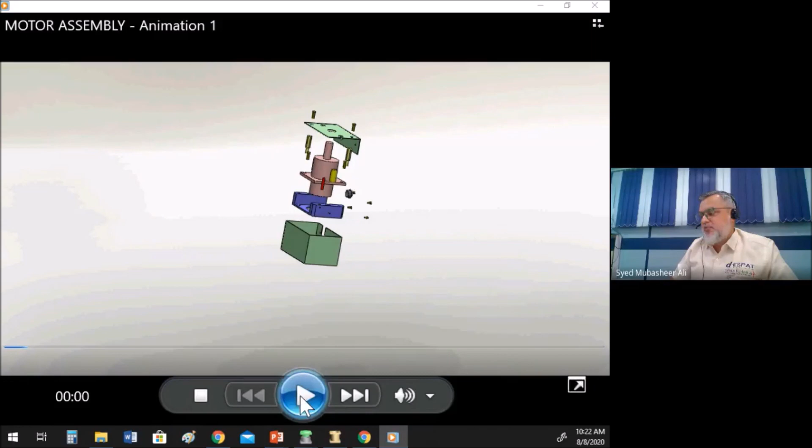This is the overview of the bill of materials. I'm going to run you through this video, pausing in between to explain the parts that get assembled. This blue base component is an aluminum base part, and it gets assembled first with a set of hollow cylindrical parts made of brass called bushings. This is then assembled with this pink component, which is a motor supplied by our vendor, held in position by 2 motor screws.

Next, I'd like your attention on this component called the standoff, which mounts itself on the base. This red part is a sensor held in position by a sensor screw. What comes next is an interesting part of our review today: the sheet metal part in green called the end plate, which gets placed on the standoff.

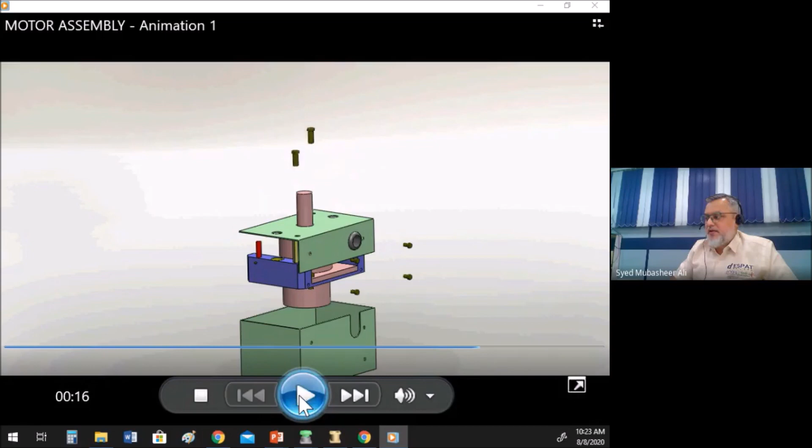This is a plastic or rubber grommet, an insulation component. Since we have a motor and a sensor, a bunch of wires need to be insulated from the metal part, so that is inserted there. The end plate is held in position by 2 end plate screws. And the last member is this green component sliding up from the bottom, called the cover, held in position by cover screws.

I hope that video was useful to understand the overall assembly. I'll keep this minimized and we'll come back to it a little later. So that's what this bill of materials looks like when it has to be assembled.

Now I'd like to bring focus on some parts we're going to review in today's session. I've listed these parts on the left-hand side, and I want to quickly tell you what we know about them. This is a component called the end plate and this component called the cover. Together, they form the enclosure of the product. If you ask why you want this enclosure, it's simple: this is a motor working in a harsh environment, and you need protection from that environment, so these components provide that protection feature.

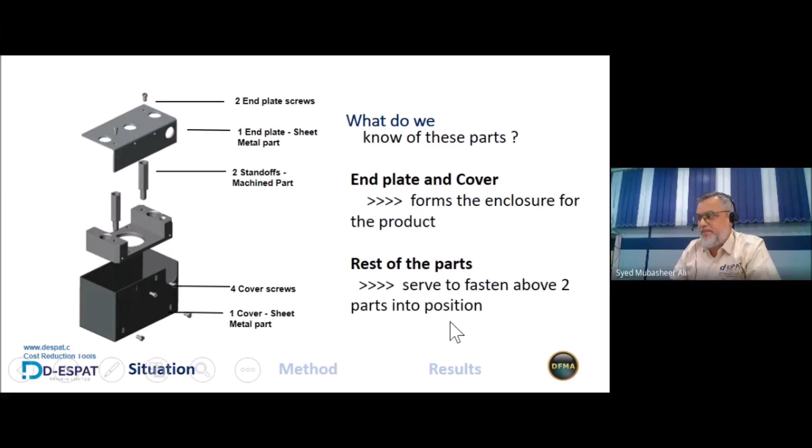I'd like you to note that this enclosure provides the protection or safety aspect of the product. How are these parts held together? That explains the remaining 8-9 parts that are there—the rest serve to fasten these two major components into position. Now, let me bring up a snapshot of the video I showed you a few minutes ago.

This is what the two parts would look like when assembled. Please keep this image in mind as we go ahead to analyze what we're going to do in terms of time and cost simplification.

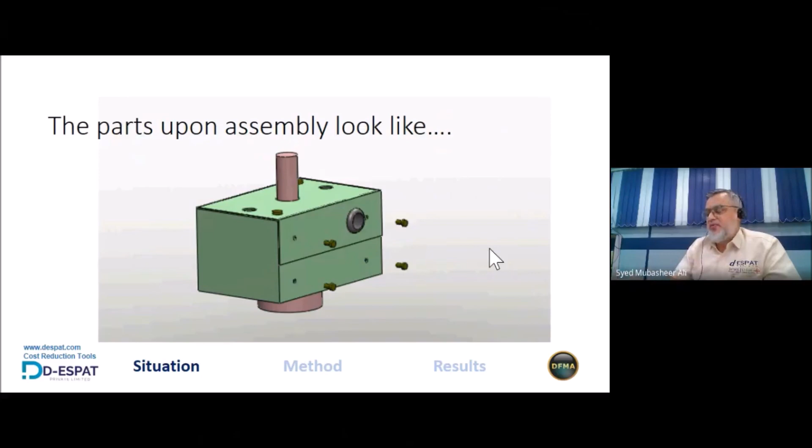Let's say we are given a task to review this design, and our management has said, can you find some ways to minimize the overall cost of this product? There are several things one undertakes as part of this review process.

That's the first part of my overview session today, talking about design review and particularly giving you a perspective of the design for assembly overview aligned to this thought process. Several different things one would do in order to get ahead.

But I'd like to ask these questions to the audience. When you come out with new ideas, how do you quantify that? How do you quantify the function of the parts? Let's say we are capable of doing this and we follow certain methods. The question next is, how quickly can you do it? Then how reliably can you do it? When I say reliably, what I'm bringing to notice is, when you come out with an idea, how do you convince your team members, your project members, your management, or your customer that this aspect is good, it is correct, it is better? These are many aspects that are of concern.

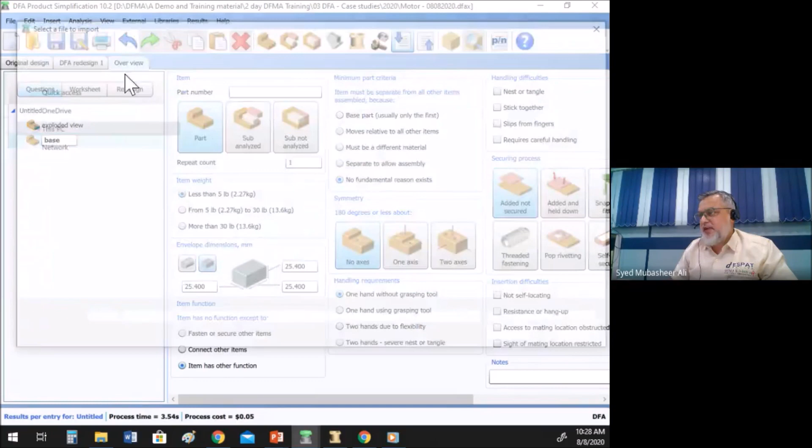Let's talk about the angle where we are keying in information. When you talk about a part, the DFA method is a question and answers based review method. So what you see on the right-hand side is called the question and answers panel. As you keep entering answers or giving details in this panel, what you get at the bottom is a cost review and a time review of assembling your part.

So when I start out an analysis with the DFA, a couple of things you need to know is how many parts you'd like to make. Maybe it's one prototype, maybe tens of thousands, or maybe hundreds of thousands. It depends on what kind of environment you're working in. Of course, if you're a university grad, you'll probably talk about doing one prototype.

You may want to have an estimate of how much it costs you to spend time on your operator, and this is basically oriented towards industry, so these things are also relevant. And how much is your efficiency in terms of the work you do? You may say, how much of my time am I spending on a project? If I'm spending, say, 50% of my time on my project, that number should probably go there.

So coming to each component in your product, what the software wants to know is very user-friendly, easy to answer questions, from the perspective of the user. So you'll say what type of a component this is, whether it is a part or a sub-assembly. What is the weight profile of your component? What's the overall geometry of your part?

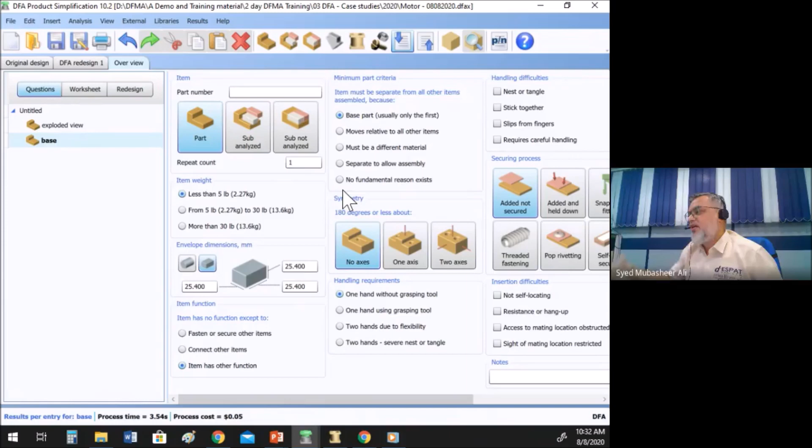Or if it is a component that has to be separate to allow assembly. For example, the cylinder head of a motorcycle or car engine. The cylinder head and the cylinder are made of the same material, but in order to allow assembly of the components inside the cylinder, the cylinder head must be a separate component. That would be the separate to allow assembly option. If it doesn't satisfy any of these, please be critical and select the next option saying, I don't see any fundamental reason for this component to exist. If you do this in a very unbiased manner, you will start finding opportunities to save.

There are 2 more things you'll probably need to add about the product as you assemble. This is your foresight about how the component is assembled. If it is a symmetric component, what kind of symmetry it has. I'd like you to notice when I click on 2 axes what happens to the process time. It will change depending upon the symmetry of the part. So more symmetric means less time, less confusion, and fewer mistakes to assemble the part. I'm sure you agree, right?

And the next thing we want to investigate about the part. I want you to understand that all of these attributes are about the shop floor: you've designed your part, it has been manufactured and is available for the operator to assemble. When he's assembling, what issues does he face? How does he interact with the part to bring it and assemble it into the full product? Those are the questions we are answering here. It involves a physical activity.

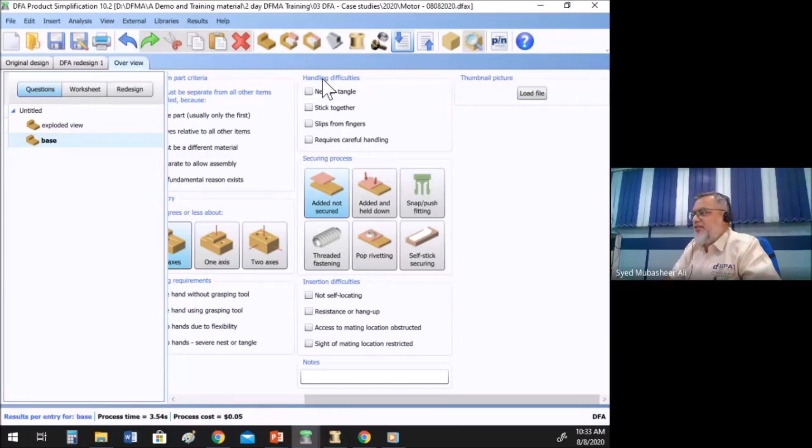How does the operator handle the part? Does he or she have any difficulties? If yes, then you'll click it. You must know that each click means you're adding penalty time for assembly. Each selection of a different securing process means you get a penalty time aligned to the process.

For example, let me go back to this original design, where in this review I've added all of the questions related to the parts. I have also keyed in all of the parts in the bill of materials. This little window on the left-hand side is not called the bill of materials; we have a unique name for it, the product structure chart. The product structure chart includes the bill of materials, but also the standard and non-standard operations required for a component to be assembled to form the full product.

This right-hand side is the question and answers panel. And for each entry that you make on the question, you get a review on the bottom left-hand corner. Now, in the interest of time, I have a product. This is my assembly, and I have keyed in all the components in this design of the parts that are here.

Now, my area of interest, which is the focus of today, is to help you do design review. And I'm basically looking at these parts, that is the cover and the end plate, and the components that are going to assemble them together. So in our tool, when you do any design entry like this, once you have done this question and answers entry format of information collection, you can do a beautiful postmortem through industrial engineering worksheet generation.

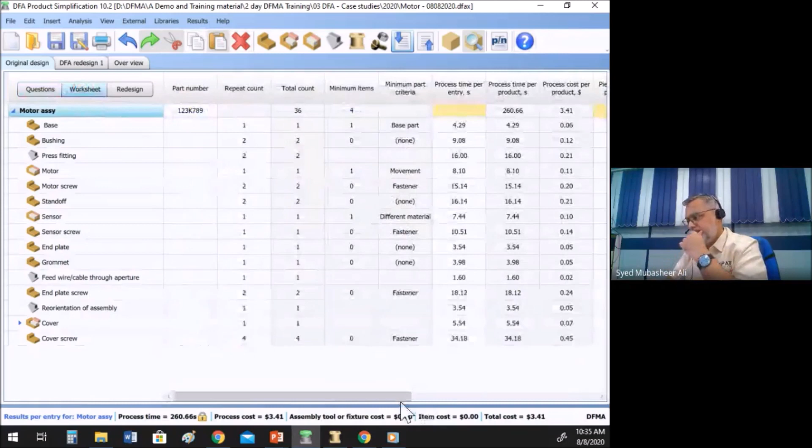Okay. And I'm not going to get into this in the interest of time, but more importantly, a very fast and relevant feature called suggestions for redesign. Ladies and gentlemen, this is a very interesting review capability of the design for assembly module. What it does is it gives you a rapid breakdown of opportunities based on the entries that you have given as a user of where there are possibilities to save.

So let me jump into this category 2, which you can see. Can you see this category 2 on the right hand side, gentlemen? I'll wait for a yes from Takshak so that I can go ahead.

Yeah, thanks. So I'm going to click on this element called fasteners and see what happens. Okay. If you look at this review under fasteners, this product called motor assembly has 4 different types of fasteners. That's what this means. Let me bring your attention again closely to this element called the cover screw, which seems to be the largest time contributor for assembly.

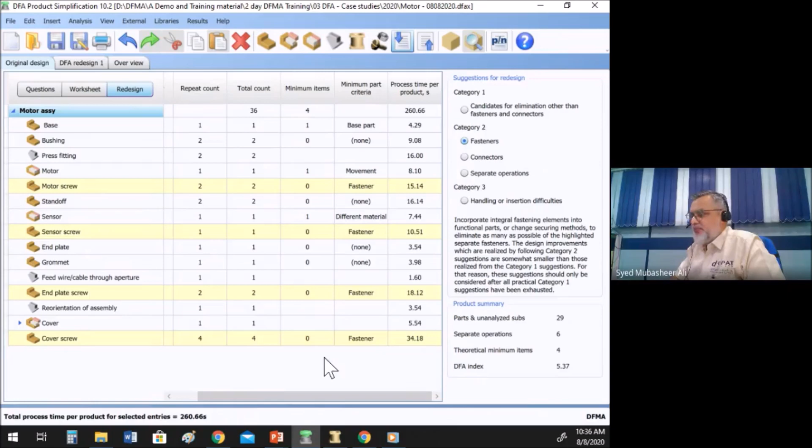Excuse me. So if you dwell on this and look at the product process time for most of the components, coincidentally, this element called the cover screw has the largest time contribution in putting this part together. So if I quickly nudge back to my presentation and show you the slide, this is a cover screw.

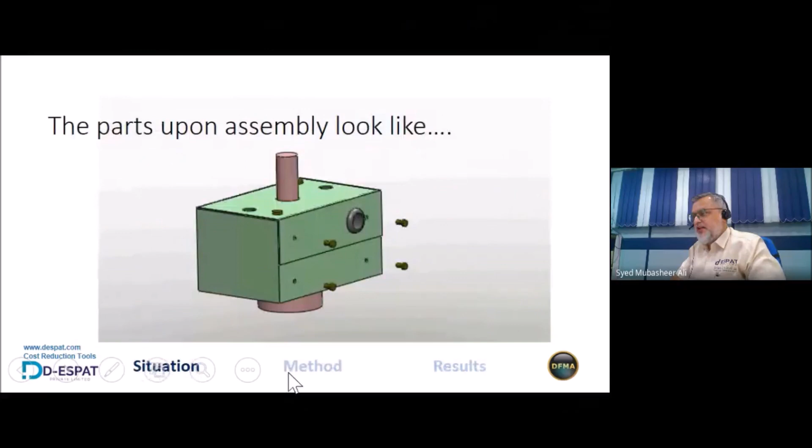Now let us just talk about this for a minute. What is this cover screw doing? It is holding the cover in place. What is the cover doing? It is doing the action of protection. Is the cover alone the component that is doing protection? Let's do this review going forward. So I've done a quick extract from my DFA review and put it up in the slide for one view dashboard for all of us to quickly understand.

Does the end plate screw fasten itself to the end plate? No, it goes through the standoff. And if you remember the video, the standoff is fastened to the base plate. And we have this cover, which is held in position by these 4 cover screws. So, ladies and gentlemen, what I've done is a neat extraction of data from what I saw as the time contributor for the cover screws.

It takes 34 seconds. And when I did a reverse thinking of why the cover screw is there, because it's holding the cover in place. Why is the cover there? It is doing protection. Is the cover alone doing the protection? No, I also have an additional component called end plate. Through this system of brainstorming and negotiating and deliberating with my team, I found out that I have in this product 10 components that serve this feature of doing a protection function.

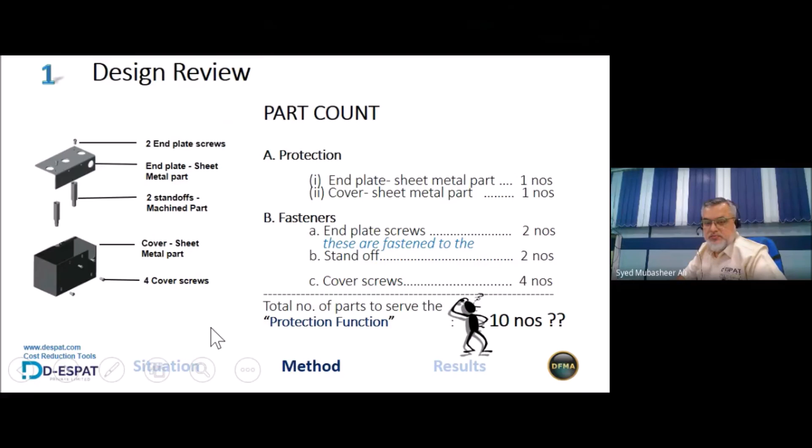So what do we do once you find an opportunity to review, right? You need to form your team, you brainstorm with them.

And brainstorming alone is not sufficient. You want to do creation of your ideas or representation of ideas through sketches and 3D models, whatever is available with you. And of course, there are a lot of deliberations that go back and forth. You need a convincing approach. Well, that is the word.

You need to convince somebody to say, buy in this design and let's go make this new proposal that we are going to make. And most likely, all of these opportunities are either value addition or value engineering, or most likely an opportunity to have a new design. Now, a new design, and if there are manufacturing friends here, they will agree that's an expensive ordeal to take on, right? Because there are some challenges that every engineer will probably have to go through in order to push his design idea.

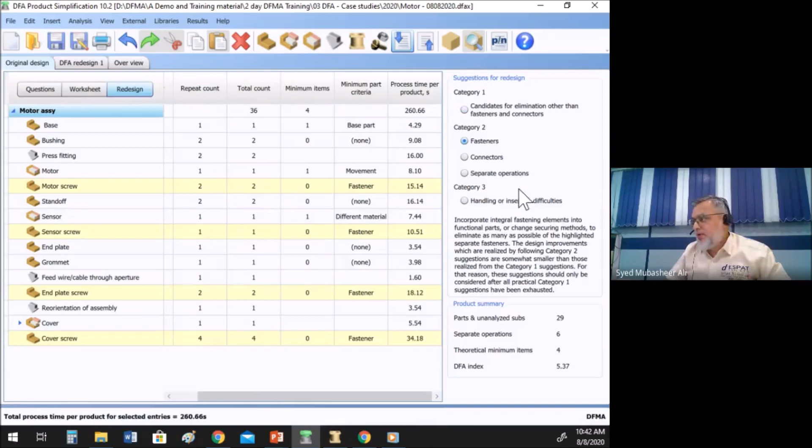Where I left off was, I was looking at this design review part wherein I looked at fasteners, and I looked at the cover screw, the largest time contributor. I challenged what this cover screw is doing. I found out what it is doing. Then I came out with a new idea. Got it? Now, if I have such an idea, what I can do with the DFA tool, ladies and gentlemen, is I can prepare a quick intent of this existing idea, make a copy of that, and probably make a new proposal of my proposed new idea.

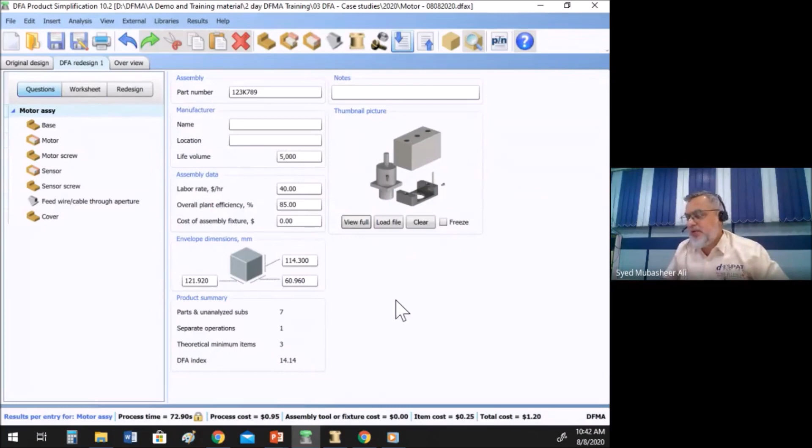Again, let me tell you, I'm not having CAD data at this point. This drawing that you see here is just a drawing or probably a sketch or just overview dimensions. Even with this stage of information available to me, I can do a very relevant comparison of my design intent. So what comes out when I have a new proposal is I can create several different rapid feedbacks of my design intent. Let me just quickly help you read this report.

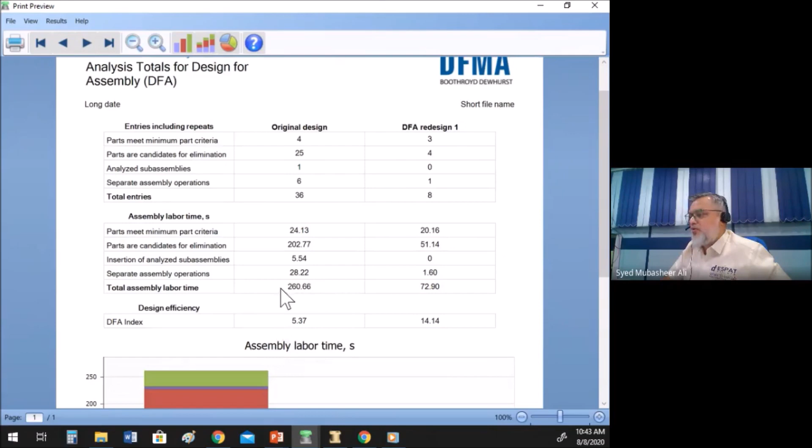So what was an original design of 36 parts could probably become a potential 8-part candidate. What took about 260 seconds of assembly time could now become 72 seconds. And also what I'm able to do with this DFA method approach is I can create a design efficiency measurement of what my existing design was and what my proposed new design is going to be. And this will be an area of excitement for us to see whether we can proceed with the design and so on.

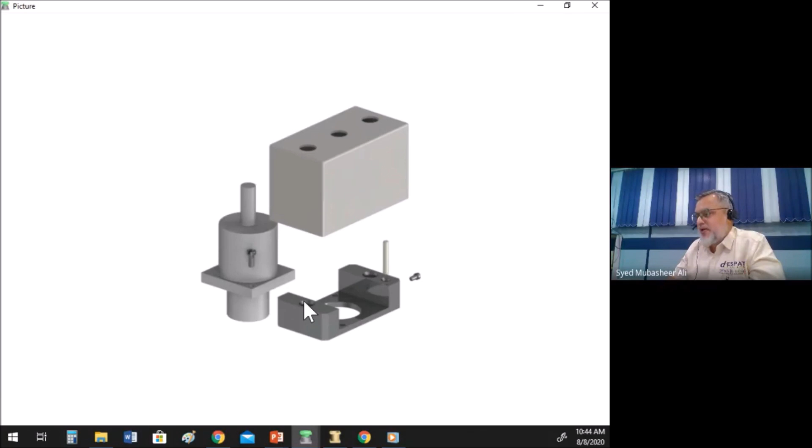Now you may say, sir, you have done this demo and kept it prepared. How do I know that I can really do something like this in the real world? So let me do a couple of real-time scenarios in the next 2-3 minutes, okay? Before I jump to the other aspect, which is called part costing using DFM. So let me blow this up for you. Look at this motor for a minute. If you remember, I told you that this motor is a vendor-supplied part. Okay, let me open the more colorful exploded view in this 3D view.

Can you see this, Anish Ji?

You'll have to keep giving me feedback so that I know that I'm on the right track and it's visible. Super. Thank you so much for that.

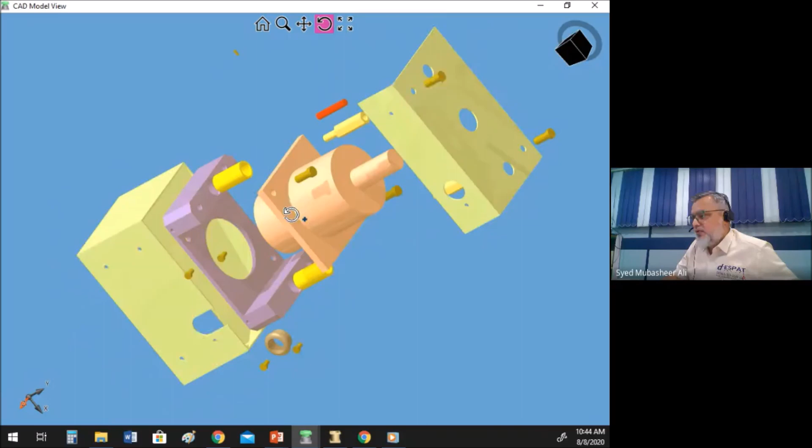Now this motor, if you see, has a very regular size base, which is almost like a square. Actually, it is a square. Now, I'm just putting a hypothetical situation for you guys. When my operator assembles a motor, he can put this motor, which has these 2 diagonal holes, either this way, or he can rotate it 180 degrees and insert it the other way. Very possible, isn't it? What happens because of that in the real world is, if the guy puts it in the wrong direction, the motor wires become a little shorter to come out of the total motor assembly.

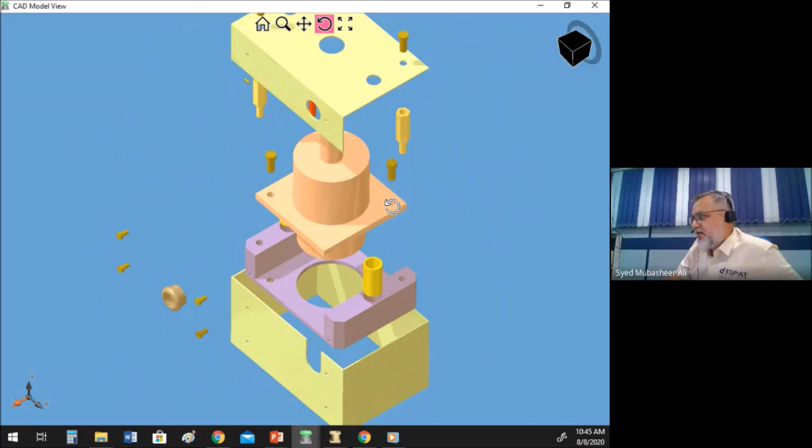So let us say I'm going to tell my motor assembler, you know what? I learned from this guy called Syed about part count reduction. So here's what I want you to do for me. Since you're going to supply motors for our company XYZ, I want you to cut off this corner like a chamfer, like your SIM card. I will ask my aluminum supplier to have a chamfer here. So I will make these 2 parts no error, and I'll use only 1 screw to fasten.

Let us say for a moment this is a good idea to do mistake proofing. You know what I can do? I can find out what is the benefit of that, or does it really make sense from a DFA perspective? Can I go and show you that?

If you are interested, say yes on the chat box. Awesome. Thank you so much for that.

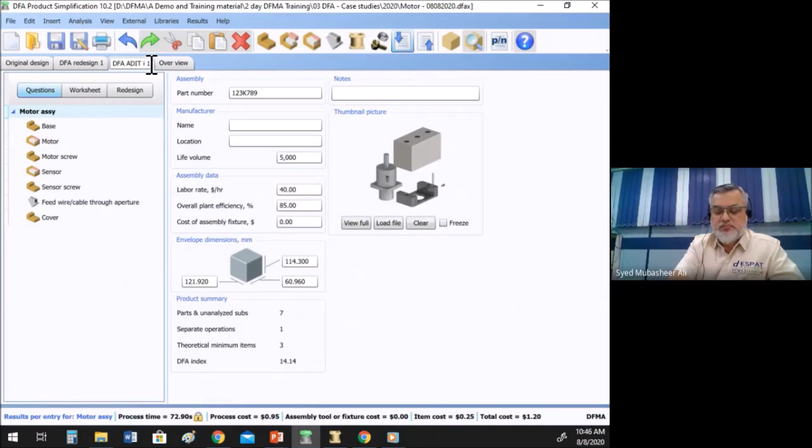So what I'm going to do is I'm going to make a copy of this, paste this, rename it, and call it ADIT idea 1. In this idea 1, I had a motor which is supposed to be placed in position, and this motor screw, which had 2 numbers, which was fastened using a threaded operation. Of course, motor screws are threaded, right?

And the beautiful thing about DFA is, depending on the process you select, it will bring up the operation characteristics that are required. If I selected held down, it brings up different types of questions. If I select snap fit, it brings up a different snap fit question. If I say pop riveting, it will bring up the operation characteristics of pop riveting. If I said threaded operation, it brings up the operation characteristics for a threaded component. Again, the database is so vast, ladies and gentlemen. If you type different methods for fastening, you will get different feedback about how much it costs in terms of time to assemble it.

Now, have you ever thought about it as a user when you build a functional component? Because most of the time as designers, we are used to achieving a function of the product, for which we are designing these parts, right? Yes, sir. So most of the time we are not challenging the parts as to how much time they are contributing.

But the beautiful thing when you do a DFA approach: let us say if I have 4 revolutions to fasten with the nut screwdriver, the process time is 18. If I change that from 4 to 14, I can get upfront what is going to be the time for fastening. So I can look at attributes like this and build much better, simpler, less time consuming product builds.

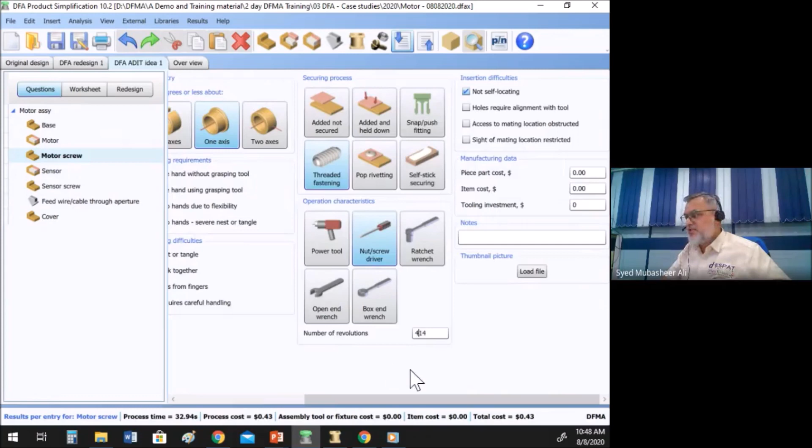So anyway, in this case, what I want to come back to is my motor is going to have 4 revolutions to fasten. Sorry, I got a little distracted with somebody coming in. And I will say instead of 2 screws, I'll have 1 screw to fasten. I can get rapid feedback of this in design intent under result proposal right now. And I'll say, this was what we created just now.

Interesting? Yes, sir.

What I'm going to do is, I have another idea around this motor screw. Just like your pen caps, which snap fit into position, I got a creative new idea for this part. What I have as an idea, I'll just quickly show you on the exploded view. And I figured out I can save a lot of time if I remove this fastener.

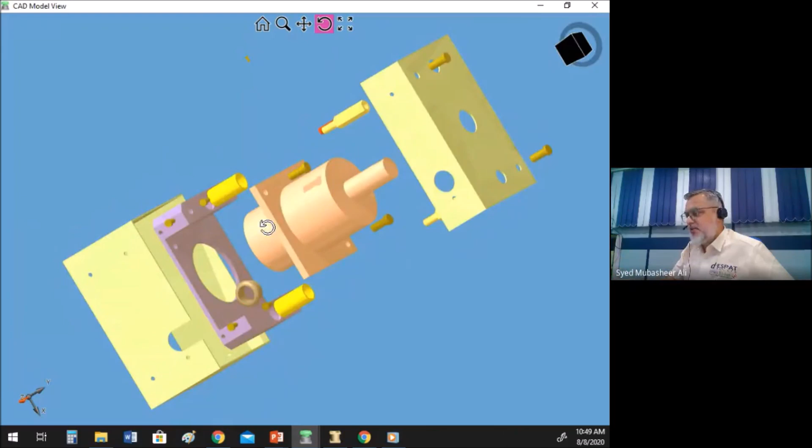So crazy as that might sound to you, I'm going to tell my motor supplier, you know what, give me a snap fit ring around this motor base. I'm going to snap it into position on this base part, the aluminum. Right now it is aluminum. Maybe I will consider making it of some other material in the future, because I want to find a cost opportunity to save there also. But the question is, what if this is a snap fit design?

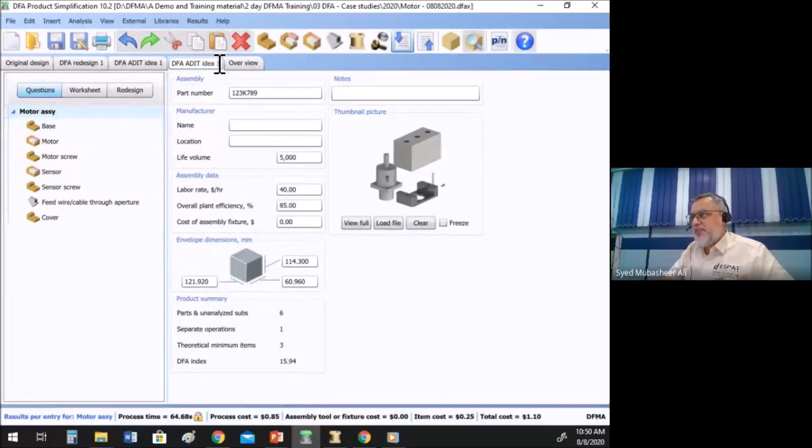Okay. While the process usually we would engage is, let's go do the engineering, let's see whether there's interference check and so on and so forth, what we advocate is you go and prepare your proposed idea in this risk-free environment. Okay, I'm going to call this idea Snap 2, in which I'm saying I don't want to have the motor screw anymore. I'll delete it. Instead, I will take the motor itself as a snap in position component. It's asking me how many snaps do you want. I'll leave it at 1.

And ladies and gentlemen, in the last 3-4 minutes, I have created 2 ideas for you in the overall picture of things for doing a design review, and a tool that is capable of giving you a product profile breakup in several different attributes. Okay. Now I'm showing you a different profile report in the interest of time. I'm showing you what is the cost breakup.

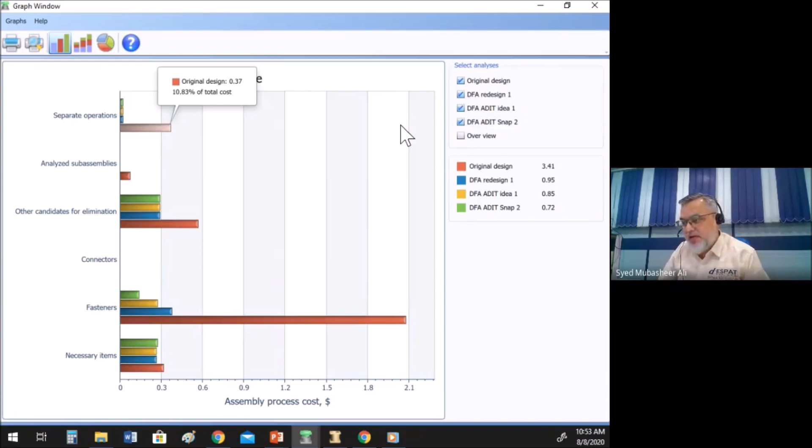I hope this helps you to understand what kind of a role this tool can play in the reviewing of your ideas. And of course, the tool has several different types of report generation. We'll talk about it at another opportunity. But let's move on to the next session of my presentation. Can I move on to the next session of my presentation? Yes, sir. Please.

Now we have this part. I'm telling the story around the same product, which we have now sort of improved. And if you're seeing my screen, these are some challenges that any industry or designer would have.

This looks like a good idea. DFA says it's got good potential to save in terms of assembly time. But what's a good process to make this part? If I change the process, what happens to the cost? Will I get savings, or will it become more? If I'm part of a company, can I give this information very credibly to my purchasing or procurement team so they can influence the vendors in how they procure these parts?

What happens if I can work with, say, Vietnam or Malaysia to manufacture this? Consciously, I'm not using China because we're in a scenario where we want to get away from it. But these are things companies keep considering, right?

So the potential we saw from a part costing perspective, I'd like to talk about before I go there: if you have an opportunity to save and simplify your product, that complex product could probably become something simpler like this.

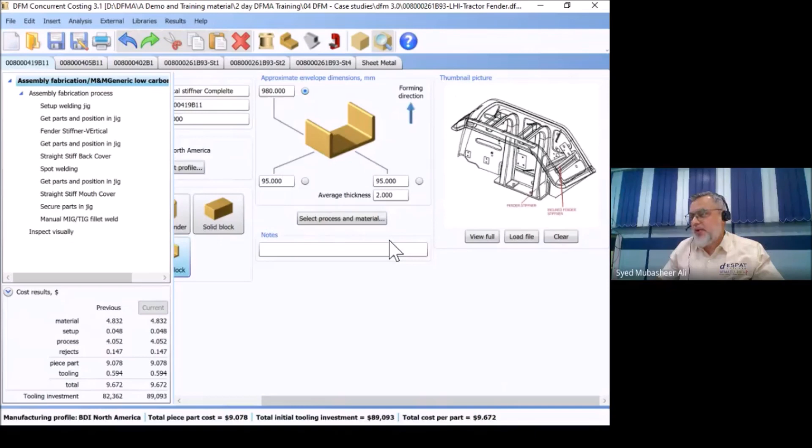This is a 3-part window again. One on the left-hand side is called your process chart. On the right-hand side is data related to the process, and at the bottom is the cost per part that you would get. What I'm going to do is minimize this, and I'm going to show you the feature called concurrent costing by opening up the DFA.

So I've come to this DFA part where I have this idea of this cover. I'm going to take this idea of the cover and concurrently open this component through my DFA analysis concurrent connector and say create a new DFM analysis. I'll say ADIT sample. And what happens is this cover information...

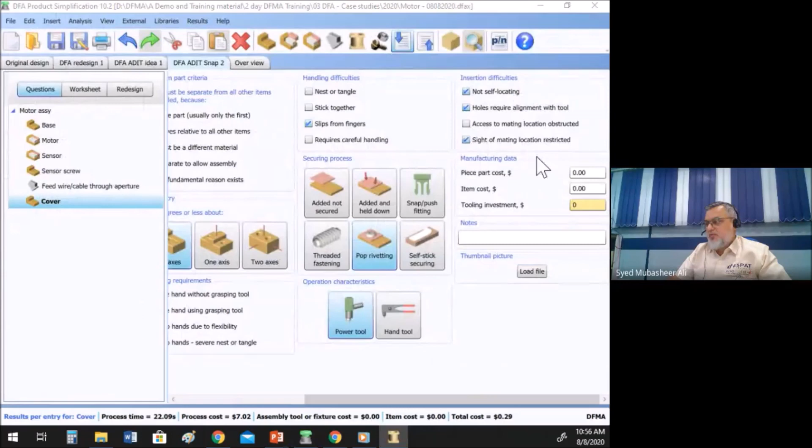Just give it a second. This cover information, which has this overall geometry - just have a quick look at this, 114, 71, 58 are the dimensions of the part. This motor assembly, we want to make 5,000 pieces. All of this information can simultaneously come into your DFM window.

Now, before I go ahead, I want to tell you this: imagine if you have a design team working somewhere in one part of the globe, and a manufacturing expert or manufacturing vendor sitting somewhere else, and these two companies are connected to the same server, they can simultaneously exchange information like this. That's why our tool is called concurrent costing tool.

So without much ado, what I'm showing you here is that the data from that cover in the DFA has come into my DFM module. It's just asking me for one piece of information, saying please can you give the thickness. So I'll say okay, I want a thickness of about 2.5 mm for this part. I have selected an overall geometry, and the life volume is automatically come in.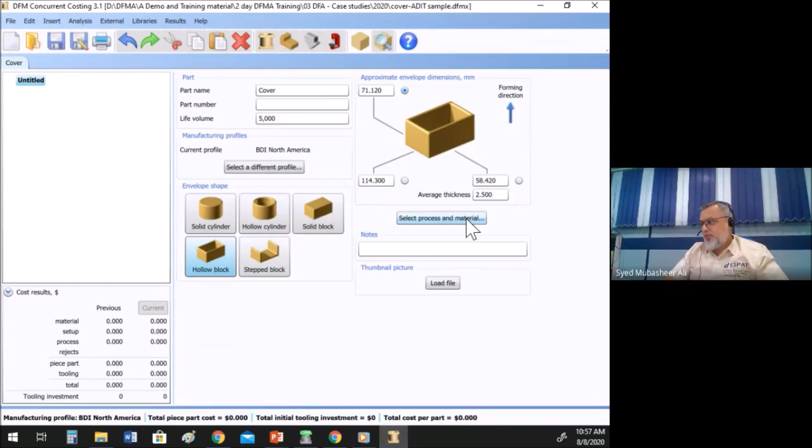And ladies and gentlemen, I'm going to show you something very interesting and very proprietary to our tool. You select this process and material icon, and what comes up - are you able to see this process material selection chart? This is very unique to DFM, which means given a geometry and a life volume, you select a process, and tada - it shows what are the compatible process materials it is suitable for.

Alternatively, if you have a material in mind, let us say we go down to plastics. Let me make this a little bigger.

If I select plastic, it'll show me what are compatible processes. Isn't that interesting? You don't have to rely on a manufacturing expert. I have a design, I don't have to go get myself embarrassed in front of somebody who's going to ask me a lot of information about how to manufacture this part. I have a tool in a safe environment, even before I go do the CAD model, before I go talk to my team members, I have the ability to review it.

For example, ABS with cold chamber won't work. Red color means the process and material combinations are not possible, maybe extrusion plastic ABS. If you see green, that means possible. Sometimes I may want to intentionally take something like this.

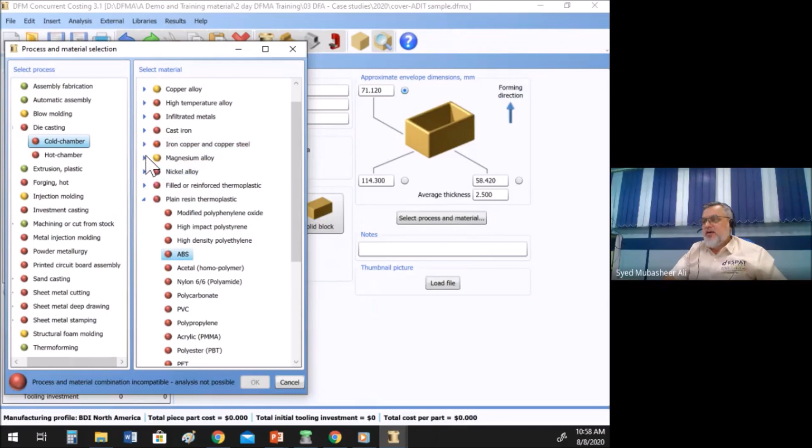I can say, you see yellows, which means you may be able to manufacture this part, but there's a potential that some things may be exceeding in terms of possibilities. For example, it shows you a warning: hey, if you select cold chamber and aluminum alloy, your volume is 5,000 pieces. It doesn't make business sense to manufacture unless your life volume is 10,000. Gentlemen, even if you're not a manufacturing expert, you have a tool that helps guide you in getting feedback like this.

Okay, let me do a little dramatic play here. I'm playing the role of this person called Mr. Syed. He and his team have done good work doing a DFA review of an existing product, and they've brought it into DFM, but they have no clue that they made an error in giving the average thickness. If you can see my average thickness, you should probably read it out for me. Sir, it is 12 mm.

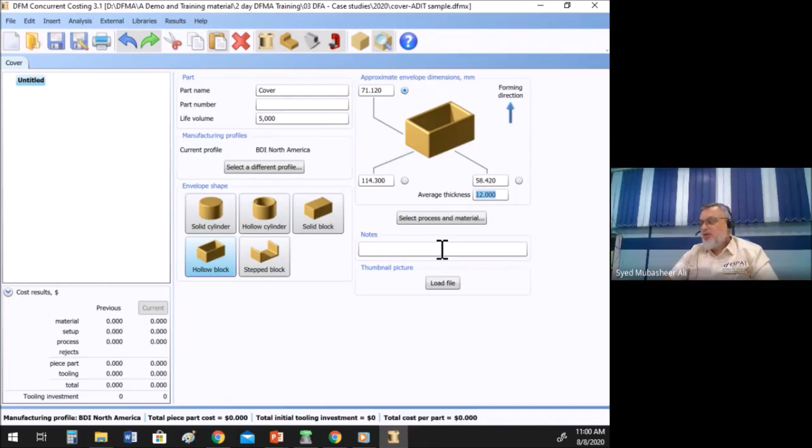So let us say this oversight of 12 mm was keyed in as average thickness. I select process and material. I'll go back and select the same process and material for your information. I selected cold chamber and aluminum alloy. You see what comes up at the bottom, ladies and gentlemen? It's saying, last time we showed you an error of 10,000 being unlikely to be economical. Hey, we got another problem. If you have a section thickness greater than 11.9 mm, you can't manufacture this part.

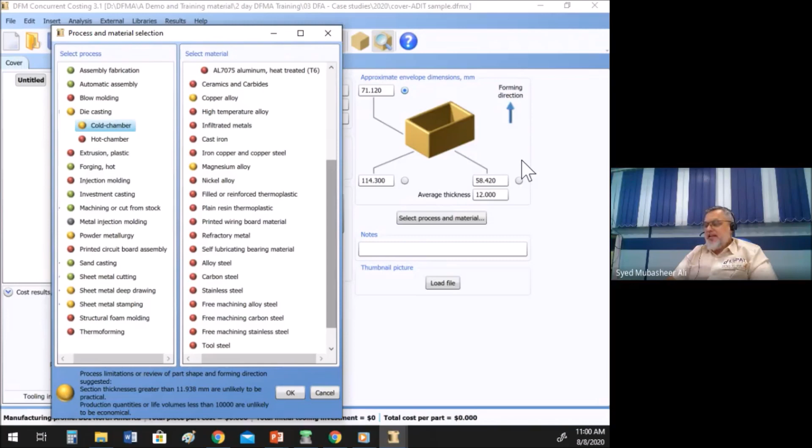Imagine if you see this error after you finish your prototyping and you came to production. Your production guy says, hello boss, you didn't talk to me, who told you we can make 12 mm? Our machine cannot cast this. You know how much money and time is spent? Companies spend millions of dollars going through gut-feel design or experience-based feedback, and they come at a later stage in the product design process where all efforts are actually lost, or the reverse engineering or re-engineering costs a lot of time and of course a lot of money, right?

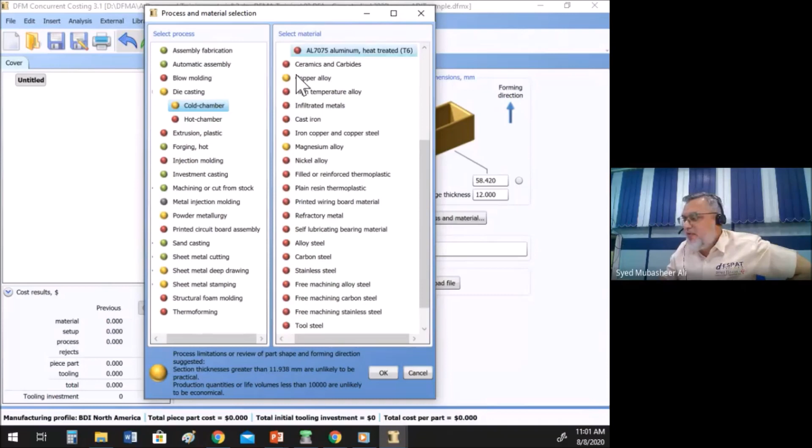So this is what the tool is able to throw out to you. This is one piece of information. The second bit of information I'd like to tell you is, DFM is not pure science. Let me repeat, it's not pure science. It is a set of guidelines documented as best practices with industry inputs, academic research done over the last 30-40 years. So while 11.9 mm and 12 mm are not so far away, maybe my manager in production will say, Syedji, don't worry, 12 mm, we will manage and get this done if this is important for you. So with that role, I'm going to go back and say, let's continue and evaluate for 12 mm.

Do you agree with what I'm saying? Am I too fast? Yes sir, wonderful. So with this 11.9 mm unlikely situation, I still go ahead, just for the sake of this presentation, and say, okay.

Gentlemen, what happened is in about 1 minute, we have quickly created a process chart for aluminum. We have data specific to our aluminum process. Since I selected the die casting process, it automatically brings up the subsequent operations required for die casting, and quickly gives me a review of my cost. There are other elements also on the right hand side, which is exhibited here.

Anishji, I'm so sorry, I would request you to keep yourself on mute. Thank you so much.

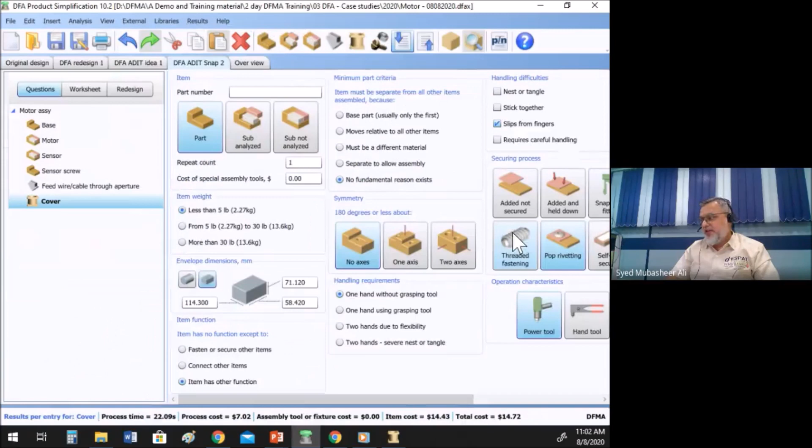So while I do this first level input, I want to quickly jump and show you in the DFA, simultaneously, this cost. Let me minimize this and show you. So if I'm a design guy sitting somewhere else, whatever cost I'm generating in DFM can come simultaneously into DFA.

That's why many of our customers, who are either OEMs working with multiple partners geographically, or MNC companies or engineering service companies, are working in the daytime in America, and by night they have data which is synced on for them on all their design intents. This is the strength of the collaborative effort of manufacturing using both these tools.

So let me minimize this, and I have some questions now, so that I can take a little short break while I have something to sip.

This is to understand from the audience, and probably Anishji, you can shoot out some of the answers that you see there. My question to the audience is this: let's say I have a vendor who says, you've told me that doing it automatic will cost this, but I only have a manual setup. If I select manual, what do you think will happen to this cost? Will it go high or low? Please collate and tell me your feedback. I know you don't know this product inside out, but just make a guess. If I select this casting process to be manual, what do you think will happen?

High or low? Anish, have a look at it. High, sir, some say. Very high, sir, others say. Are many people saying high or are many saying low? Many people are saying high.

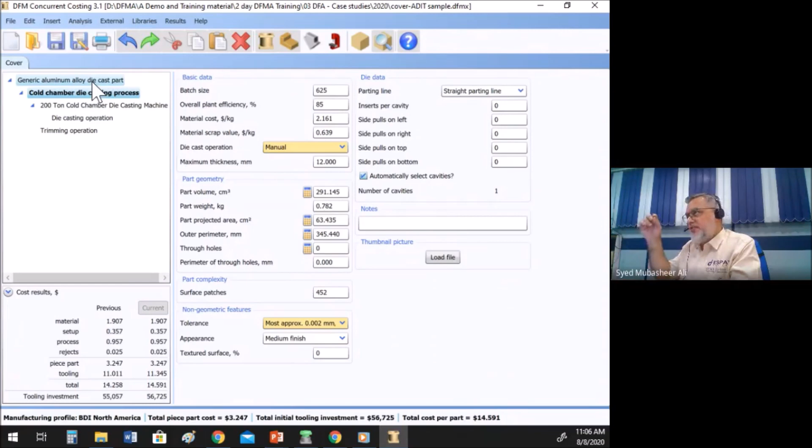Okay, now in the essence of time, I think we started 15 minutes late. I'm hoping I can continue for another 15 minutes. Is that okay, Dr. Ajit? No issue, sir, you may continue please. Okay, so.

What our software actually intuitively does is it goes and selects the most economical machine on which jobs should be done. It goes and selects and recommends the most effective combination of elements that can help you to get the lowest cost at the first go. Okay, how interesting is that?

But now I'm going to play a different role for those of us who are from the industry. Let us say we are talking to a vendor and he says, sir, you have done a casting with this ideal estimation. That I understand. But you know what? The smallest machine I have in my factory is a 900-ton machine. So many of our customers use this tool to have realistic vendor cost estimations. So I will say, okay, check, let us use the 900-ton machine's database values and run this analysis.

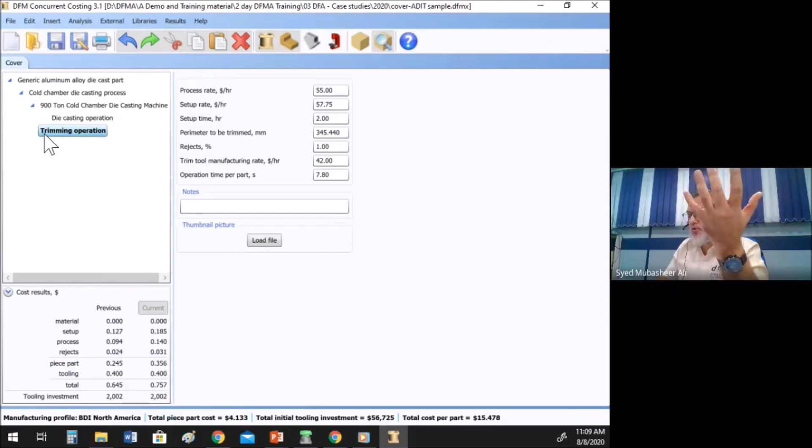I showed you what was a primary process called die casting, but a product like this cannot be just finished with die cast or the first primary process. You may want to have subsequent, secondary, and tertiary operations. So let me go and add a machine tool. So this is the list of machines that you can probably add as a part of our operation after a die casting operation. Many of the commonly used machines in the world are available as a part of our database.

Okay. Now you may say, sir, your machine only has what, 7 types of machines? 1, 2, 3, 4, 5, 6, 7, 8 types of machines. Well, ladies and gentlemen, that is not the case. Let me go quickly and show you that we have 3 different libraries. We have a library of operations, materials, and machines. Just in the interest of the context of this part of the session, let me open the machines library. Okay, this is my machine library.

All right, and it's very exhaustive. It has got a comprehensive database of machines from different commodities and different actual company models and makes and manufacturers. Then the question is, hey, why are only these machines coming up? That's what the software beautifully does. Depending on the process that you have selected, whatever is a possible set of equipment that you can use for subsequent secondary operations, only that it will bring up for you. Thereby, it prevents any user error. Okay, that's another interesting feature of the tool.

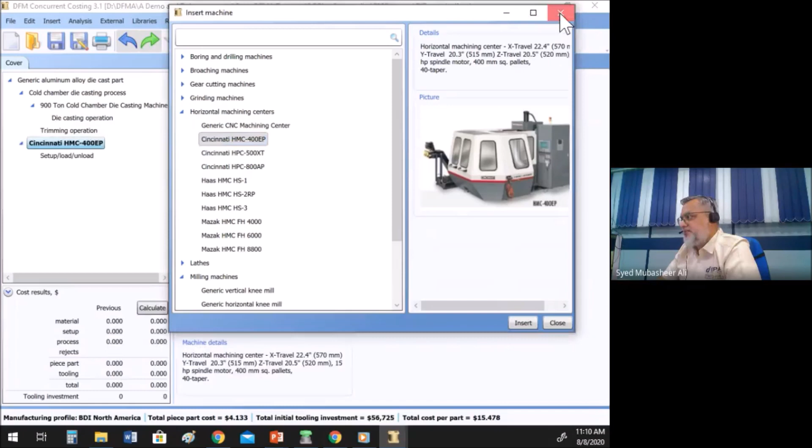So let me just go arbitrarily pick a horizontal machining center and insert it. Okay, so whatever is the operation characteristic of that machine in terms of cost to run it, in terms of power, the spindle speed. Please note that the spindle speed here is 8,000 RPM. And you can go and set up other things like what is going to be the cost to set up and unload and load parts in this machine to do the operations, what type of holding devices you can use. All of this has a bearing on how the cost can plan out. You see, you get a rapid feedback of your design intent.

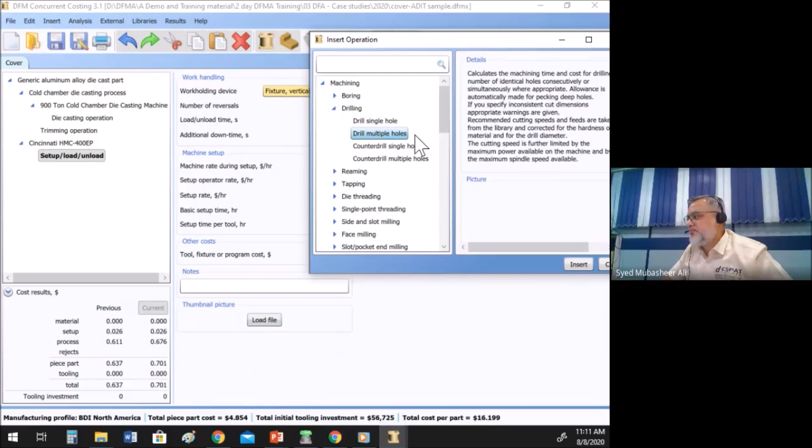Let me just do one operation here, gentlemen. Let me go and add an operation of drilling 3 holes. Why am I going to drill 3 holes? Because if you remember, this part has 3 holes in the top. So just for the sake of it, I'm going to drill 3 holes. Okay. Let us say that the dimension of the hole is 15.

Can somebody tell me what is the length of the hole? If you're watching my input, somebody can tell. Sir, it's 0. Right now it's 0. Right now it's 0. Yes, of course. What should be the value I should input there?

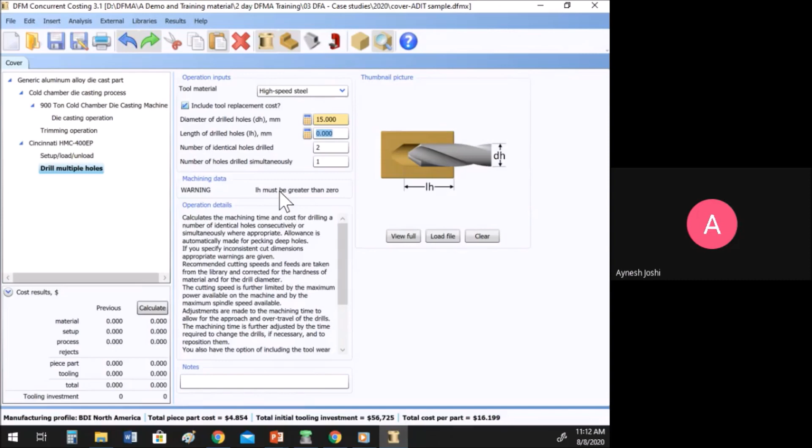Sir, 20. You may keep it 20. If it is related to the part which we are going to manufacture, it has to be the same as the thickness, at least. Yes. So what is my thickness? If the thickness is 12, we may go by 12 millimeters. Correct. So the thickness of this part was 12, and I'm going to give 12 as the length of the hole to be drilled. Thank you so much for that, Aynesh.

And we have 3 holes to be drilled simultaneously and 1 hole at a time. So when I key this information and press calculate, gentlemen, automatically the software brings up these attributes. That is the machine data, the machine limitations, how much cycle time to machine those holes, and what will be the volume of material removed. All of this is estimated as a part of the exercise.

Okay. Now, I'll just show you something interesting. Again, I'll play the role of a vendor. If I was a vendor and a procurement head was looking at this, he will say, you know what? This machining can be done with a machine that has got 1,300 RPM. Why are you selecting such expensive equipment which has 8,000 RPM to do this job? You see, these kinds of estimates can come out of this tool. Now, talking about drill, we gave 2 bits of data and we got 3 pieces of information which I can edit and about 4, 5 pieces of information that are generated from the tool.

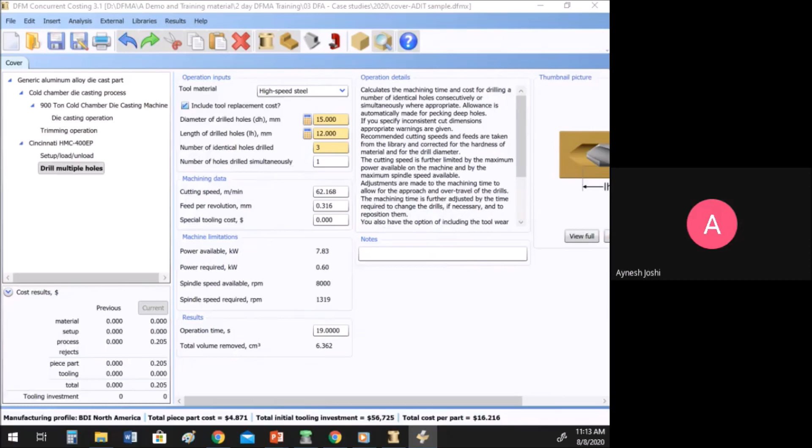Can I show you the library of operations that we have? Yes, sir. Please. Okay, here is the library of operations, and these are all the secondary and tertiary operations that one can do as a part of manufacturing a part. So let me go to that selection that I made of drilling a hole. Remember, this is the drill hole operation. This is from the library. What was the data it asked us? It asked us, give me the diameter, give me the length, right?

But if I edit the formula that drives a single drill hole operation, ladies and gentlemen, what you see here is the standardized set of equations and algorithms that drive a single drill hole. Let me just move this middle line up. This below is the variables list. You can see the variable list count on the left hand side, 1, 2, 3, 4. There are about 53 variables that drive a single drill hole.

Then, sir, why are not all of them shown? Well, the software is so designed that it allows you to focus on your design and not on all the background calculations. So those that the user can edit are kept in a tick box state and shown to the user here. Those that are not to be shown are shown sometimes based on the calculation, and many of them, as you can see, are never shown.

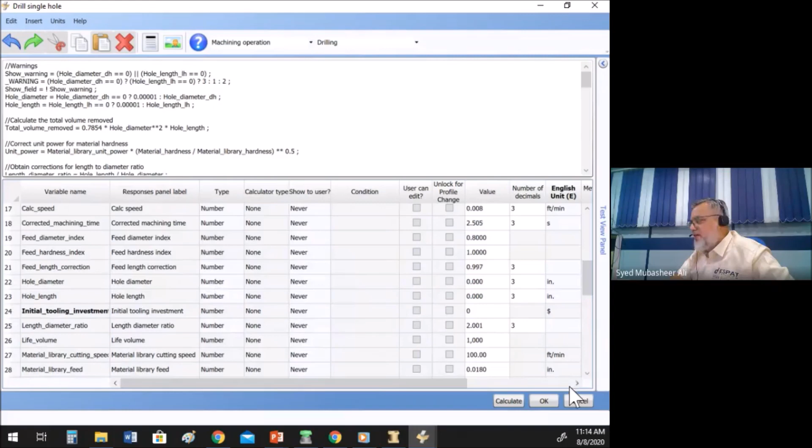Now, if you are interested and want to do some research, you can use this calculation capability. You can cut and paste this out on a notebook and do an entirely different set of review or further research. So this is also available. I hope you appreciate this part of the operations tab. Yes, sir. So I showed you two libraries, that is operations and machines. I'll come back to the materials library, that is also part of our system. So I showed you a primary operation.

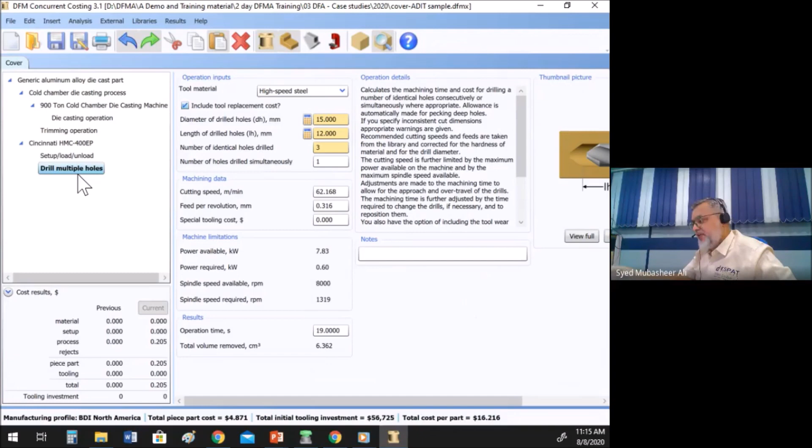What our tool allows you to do is all the activity of converting your raw material, right from the input of the raw material to completely finishing the part and shipping it out of the factory. So if you want, I can do subsequent operations like inspection. I can do measurement. I can do treatment. I can do painting, packing. All of this is a part of the database. In the interest of time, I'm just picking this up. And all of this can become a part of your overall cost structure.

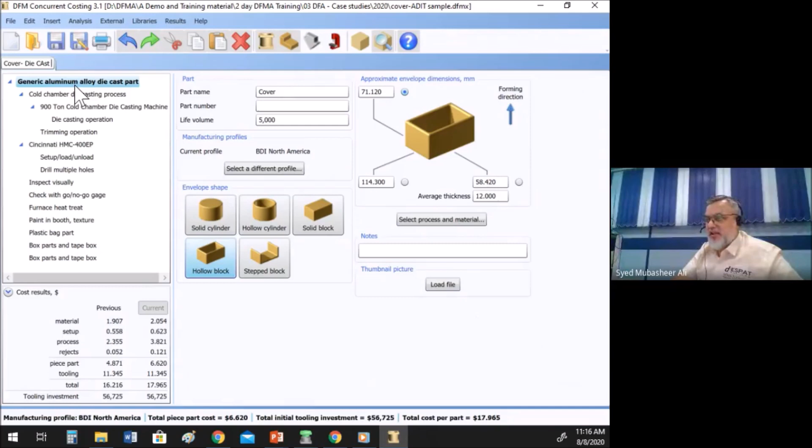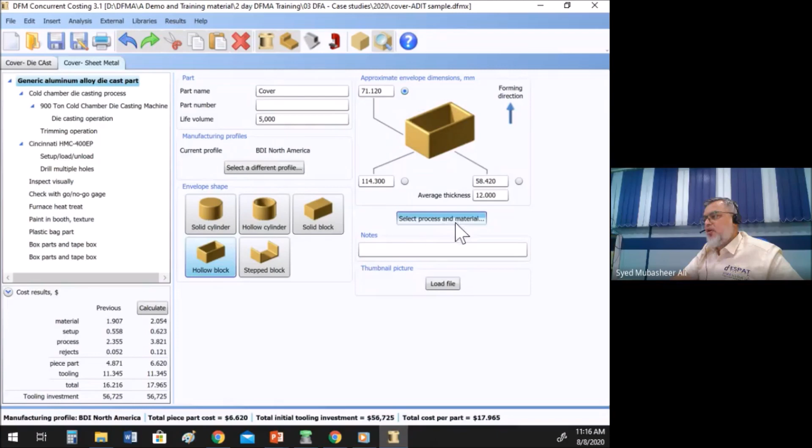So let me just rename this. I promised you that I'm going to evaluate this particular cover design in 3 different commodities. I've already done it for aluminum casting. Do I have your permission to go and do it in sheet metal and plastic? Yes, sir. So let me make a copy of this and paste it. I'll rename this as cover in sheet metal. I want to show different attributes of this tooling capability as I keep doing this. So, given all these things being the same, I'm making a copy of this and I'm going to select and change to a new process and material.

Okay, this was our previous selection, cold chamber and aluminum. Now let me go select a different material altogether and also a different, say, process. Intentionally I'm selecting yellow colors just for the sake of talking about a few things. Can you see the limitations it is showing at the bottom? It is saying, hey, if you've selected a process in which the material thickness is greater than 7 mm, it may not be practical.

I'm saying, never mind. Tomorrow when I go to office, I'll sit with the experts and discuss this. But right now, I want to know what if it is this combination of process and material selection. And it's saying, can I switch the data from the old to the new? I say, okay. Can you see that warning? It is saying, you know what, Syed, you selected a process and we don't have a machine in our library that can handle 7 mm thickness. Okay, I'll take this note also and I'll say, okay.

Even in spite of this error, the tool goes and takes the largest machine in our database and creates this first level estimate. So as I said earlier, this is not pure science. You can see when I look at the laser, the machines that we have for sheet metal, all of them, it is saying it is in yellow. It means all of them are not capable of doing the stamping. But since I said I still cost, it goes and gets the cost based on the biggest machine that is available, so that I have some reference of this selection that I have made.

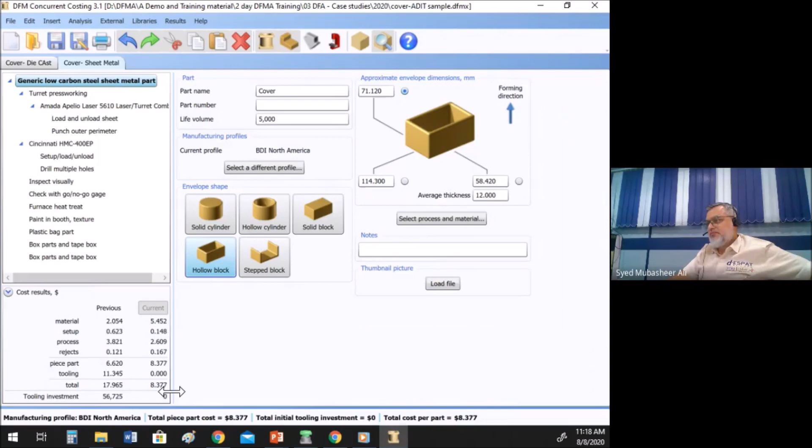So this was our previous estimate for casting. This is our new estimate for sheet metal. And of course, the sheet metal questionnaire is different compared to the die casting questionnaire. So each module, each commodity has different types of data that it has generated, which you are allowed to sort of key in. Now you may say, sir, should I know everything? Well, whatever you know, you key in and you get estimates. If you don't know, get somebody who knows it. But the point is that somebody who knows it has a good amount of data on his plate to go around and make changes and give the right inputs rather than waiting for each one of them one at a time. That is the beauty of the tool.

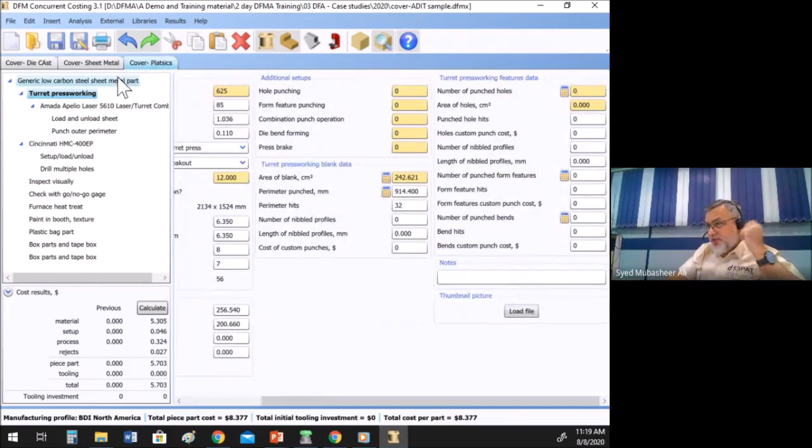So I'm going to take a minute to change the sheet metal data now to plastic. So with this data of the part geometry, the same thing. I am selecting ABS plastic. It's a good engineering plastic. I like it. And I will select, say, injection mold. So here again, it's showing a warning. It says, if you have a section thickness greater than 6.3, unlikely to be practical. If you select production volume less than 10,000, unlikely to be economical. I'll say, nevertheless, I want to do an apples to apples comparison. I'm going to say yes.

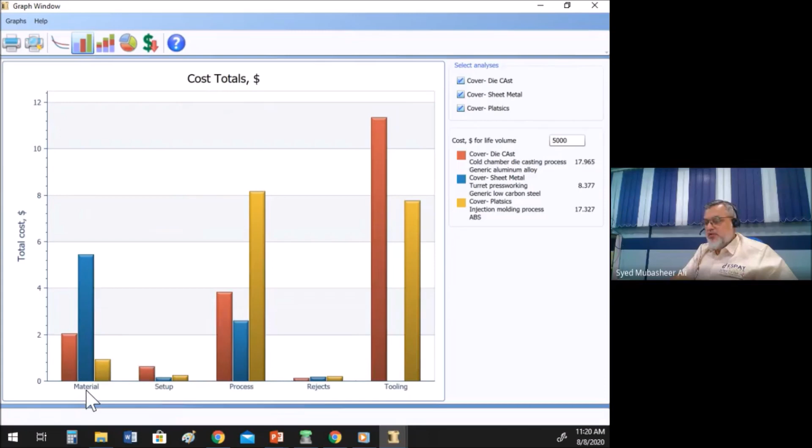So in about 10-15 minutes, gentlemen, we had the idea of a part, and we took it through a journey of 3 different commodities, lots of numbers. So let me make it much more easy for you. Let me go and look at the cost totals on a single dashboard. So that's the breakup of manufacturing the cover in die-cast, sheet metal, plastic. It'll cost you 17, 8, and 17 dollars for 5,000 volume. Okay, and if you move on the graph, each graph will represent how much percent it is contributing to the fabrication of the part. And the setup is shown in terms of material, setup, process on the X, and the Y axis as cost. If you don't like it, you can use a stacked bar graph.

Make sense? And there's one interesting feature before I move on and close this session, gentlemen, for questions. A feature called Cost Reduction Guide. This is a tool manufacturing experts could probably use as a part of their activity to explain to designers what attributes of their product are contributing how much to the overall cost of manufacturing the part.

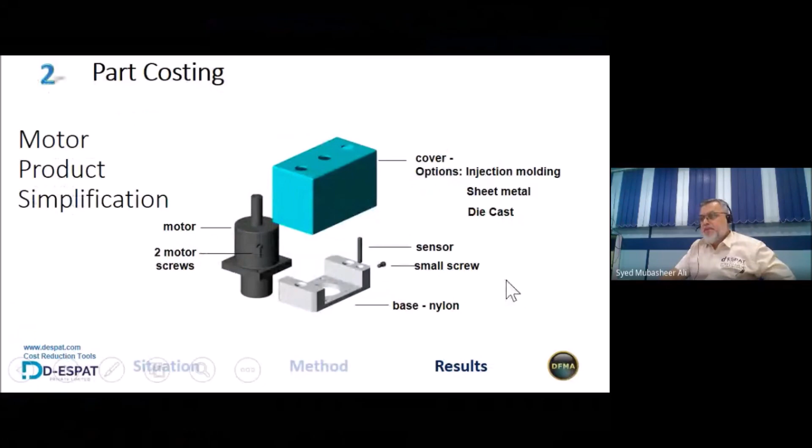Let me continue back to my presentation, wherein what I was able to do in the last 10-15 minutes was give you a breakup of those parts and find out what it will be like to make in different commodities, different regions. What I did not show you was you can have different geographical data. We can have data for USA, for China, so on and so forth. And you approach this thing for doing part level, product level DFA and part level costing. A product like this is the kind of benefits you can probably realize.

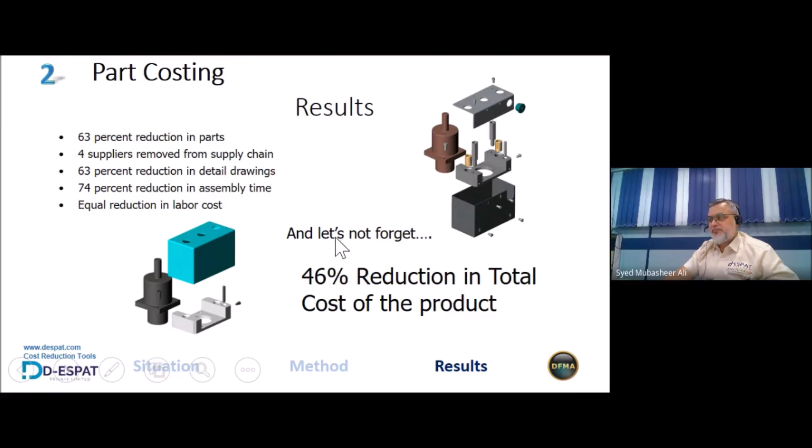Okay, so a few things to help and wind up: the 3 things that you need to know to get started on doing a DFA or DFM is select your scope of doing your product design review very wisely. What I mean by that is engage with your community, whether a team or members that are relevant, who can help to participate in bringing about this change.

2 pointers for you to know: if you put small and medium efforts, you get small and medium benefits. This basically revolves around if you only focus on the part, which I showed you as the second part of my demo. If you want to get larger benefits, you should focus on the product. DFA is that candidate that can help you to do it. Okay, that was my first part of the demo.

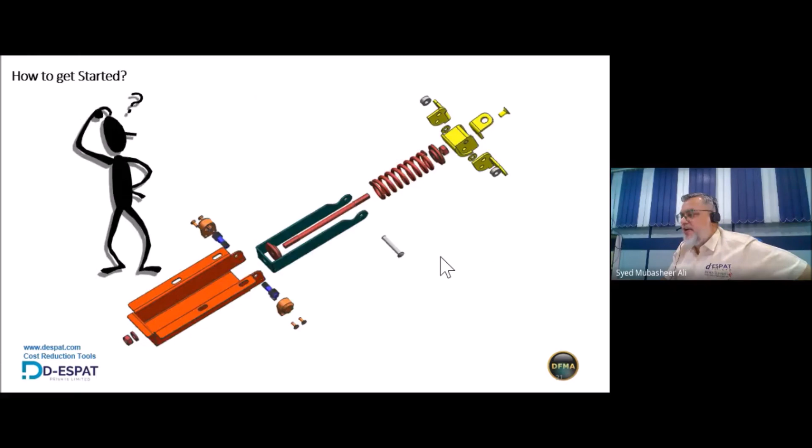So you may say, sir, give us an example of what and how to approach it to get started. Here's a brief example. It's a very simple mechanism of a hinge in a military box. And please go and review or attack what you think is your low-hanging fruit. In this case, this head assembly, which is a 7 part assembly, is a good candidate for consideration in this product to be reviewed.

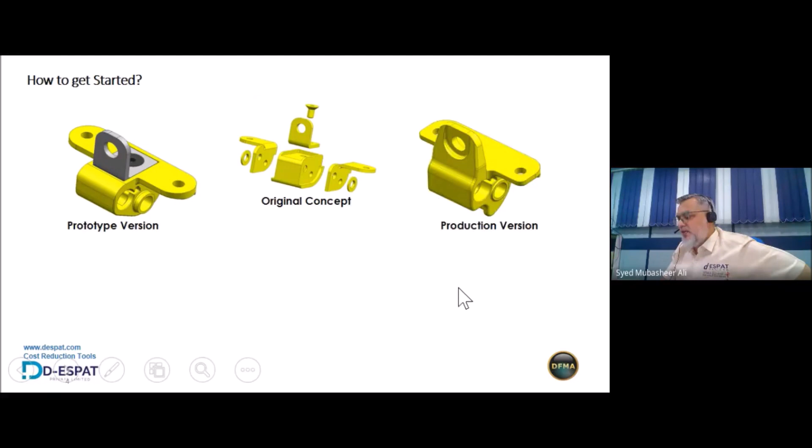Normally, people would end up doing the 3D model and go ahead to make prototypes of the product. But here's a tool, DFM and DFMA, that can help you to get your product breakdown of your existing design, of your best proposed final design, find out the elements that can go out to bring about changes in terms of reduction and simplification and so on.

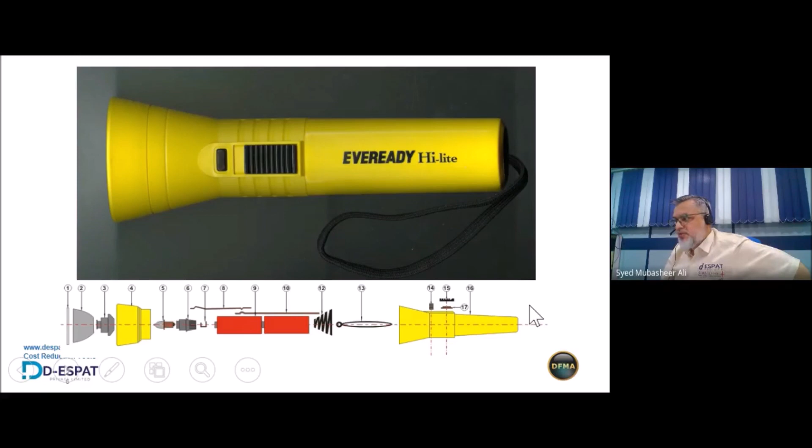So this is a bunch of college grads who have done this, keeping these components as standard, which is the battery, which is available off the shelf, and the bulb, which is also a commodity that you can buy. They've rejigged the whole of this assembly from a 17-part design to a 6-part component. Again, when you go out for making new designs, there is one thing which you should be aware of: some things are super systems.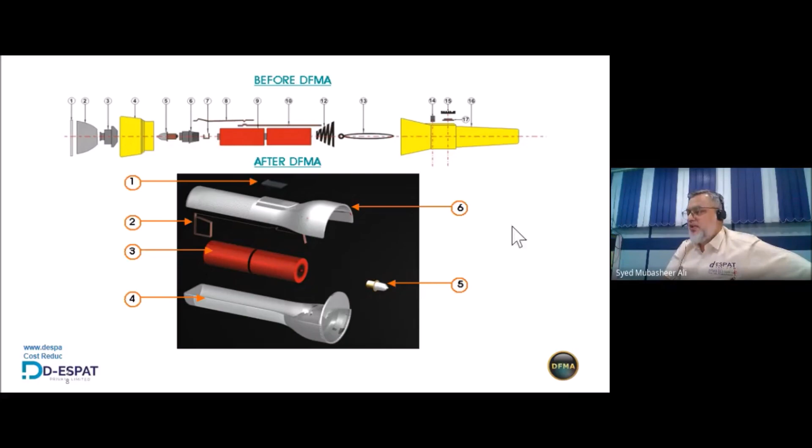For example, you may say, sir, you told us about part count reduction. Can I convert these 2 batteries as 1 battery? Well, you have to go start a new battery factory for that. But that's not the intent. It may not be the area of your immediate focus for your company. So you need to set, as I mentioned in my first slide previously, amongst the 3 things, your goal that can be achieved with the capabilities, network, money, time that you have as a part of

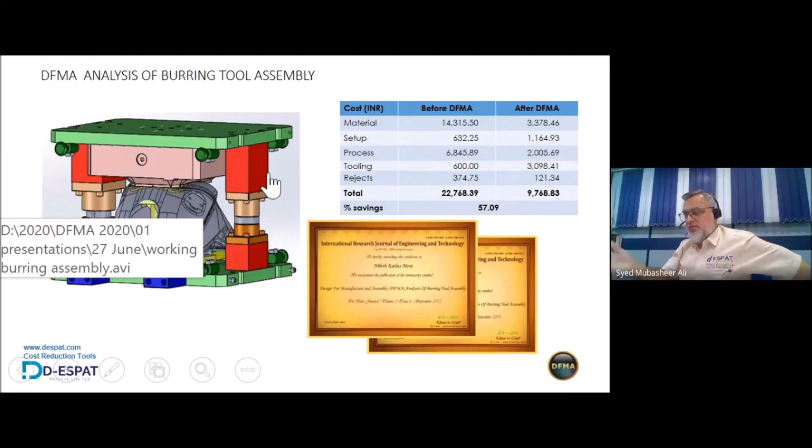your project. Another example of a little more complex thing done by a student, something as complex as an aeronautical challenge. And even a tool, like this is a burring tool, which is used for stamping sheet metal part of a motorcycle tank. This is a student project again, who published it in an international journal.

So last few slides before I wind up in 3 minutes. Question is, when do we get started, sir? It's never too early, never too late. And if you're a part of a company, this applies to you. Educate and involve the upper management and start right away.

So some of the tips I'd like to offer for those who are in the engineering service business, especially if you're doing reverse engineering or any type of black box review. If required, do a teardown analysis. If unfamiliar, use people who can contribute. Analyze every suggestion and visualize the consequence. Many times as designers or people with engineering knowledge, when somebody makes a recommendation, you say, that will never happen. Oh, this physics does not apply, and so on and so forth.

Please capture as much design intent as possible, because you have a tool that can help give you a design review. Like the motor example I did. Can I do a snap fit? If I talk to the actual motor supplier, he'll say, sir, what are you talking about? Snap fit, I've never done in my life. But I do a what-if scenario to find out what will be the benefit of something. When I see value, then I go ahead and see how I can engineer it. That's what I'm trying to profess. That's what most of the Fortune 1000 companies do in bringing about more cost-effective products.

Now, if you're a part of a company, gentlemen, or if you're part of a project team, who does what? Well, those who are managing should provide for the team. They should provide time for the team to do this. They should provide tools along with the time for the team to go and investigate, because that is imperative. You can't run your priority projects and also give stepmotherly treatment to doing a project design review with DFA.